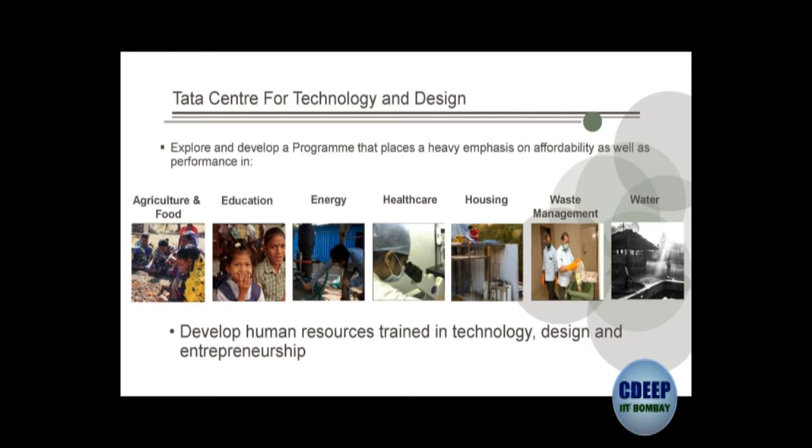So, this is something you know about Tata Center. We have different areas in which we are working, and all of them are of interest to society. This is a project that comes from the food and agriculture area, and as the title says, Jaggery.

There is no need to tell you what Jaggery is. Almost every Indian knows what Jaggery is, and probably all of you know how it is produced, especially those coming from Maharashtra, Karnataka, Uttarakhand, Delhi, Meerut, Andhra Pradesh. Everywhere you see a Jaggery making plant, but the main feature is that these are small scale plants. I would call them typically a cottage industry. The capacity doesn't go beyond a particular limit, and this is the way it has been happening for so many years, about 200 or more years.

If you go to a Jaggery plant today, you will not see much different from the way it was done long back. That is because this is a sector which has not really seen the high-end research or development that's happening on the technology front. There are reasons behind that.

Anyway, now coming back to why we are working on this. As I told you before, in Tata Center the idea is to see a possibility of making interventions, either technology or design interventions, to help the community which is at the base of the pyramid. Who is at the base of the pyramid here? We are talking about farmers who are growing sugarcane. Some of them are selling this sugarcane to sugar factories, but there are few farmers who are not able to sell their sugarcane to sugar factories for so many reasons.

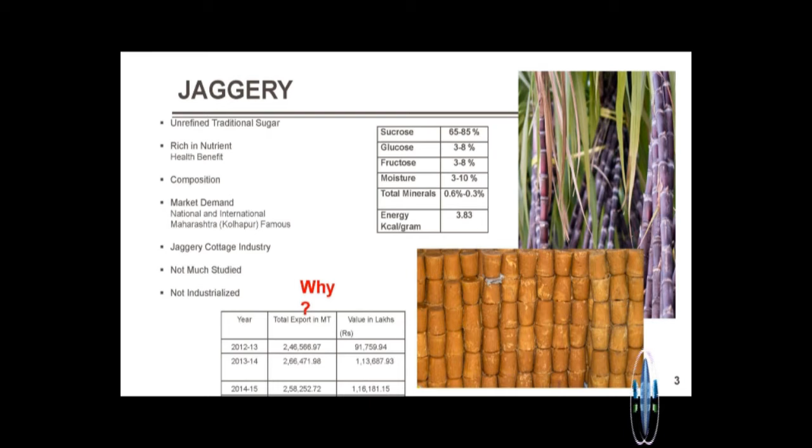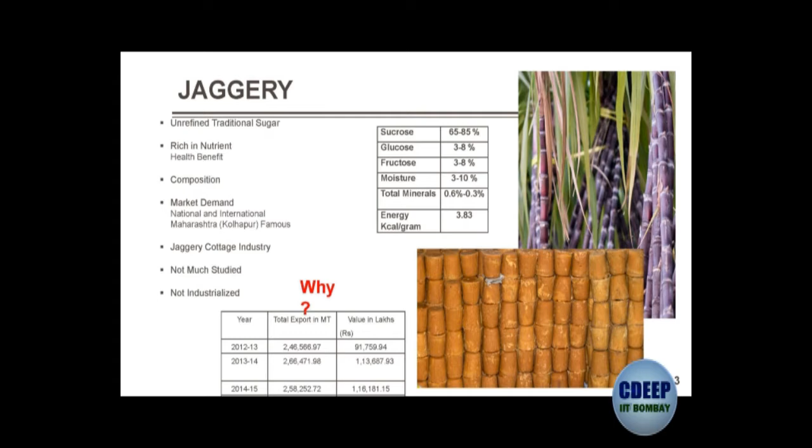Now of course this is the information about jaggery, all this I have told you just now. Jaggery as a product is rich in nutrients compared to sugar, all of you know. If you are able to make jaggery on a large scale and make it more popular, then health wise also it's a win-win situation. On one side it will fetch more earnings for farmers, on the other side you are adding a very good food sweetener in your basket.

Now the way jaggery is made, of course I don't need to tell you in detail, those who have visited jaggery making units. Cane is brought to the unit, it is crushed, cane juice is clarified. Chemically it is nothing but water, sucrose, fructose and glucose, and some impurities like proteins, gums, and some metallic impurities, iron. I would say impurity because iron sometimes is nutritious, but from the point of view of sweetening, iron may not be desired.

So all these ingredients, now I want to make jaggery out of it. The first thing is, if I just evaporate water and get a residue, it will be much more dirty, it will look like a black tarry material. So we need to remove these impurities, especially the proteins and gums, and allow the crystallization to take place, while also getting a product with a desired color, a bit attractive, yellowish. So the clarification is done.

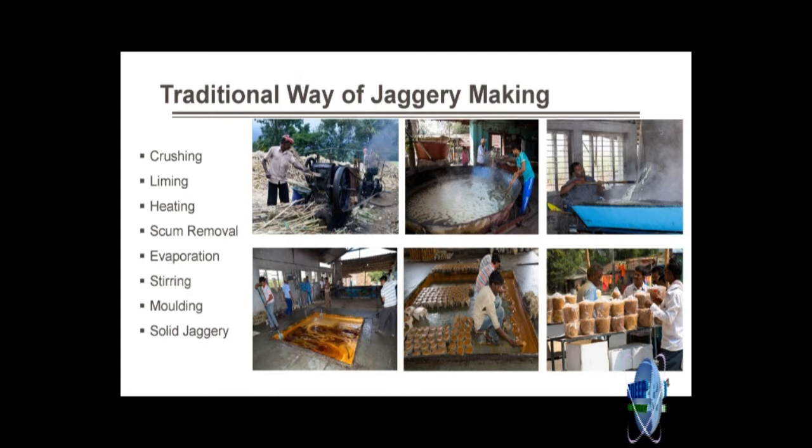And then you evaporate it. Once it is evaporated to a particular concentration, this hot thick syrup is then taken for crystallization. This is where the crystallization is happening. And then you put the stuff in the molds, and then the molds are taken out and taken to the market.

How is it different from sugar? Chemically, white sugar is almost 100% sucrose, crystalline sucrose, and this is a mixture of sucrose, glucose, fructose, and whatever trace materials you have. That's why, from a texture point of view also, it is different from sugar. It is not fully crystalline, it's a mixture of crystalline and amorphous matter.

All right, so now this is the scenario, this is the way it is done. Now what is the problem? Why can't we go to slightly higher capacities? It's because of this particular case.

You have a pan which is 13 feet in diameter, and that's the maximum one can do, because if you want to increase the capacity further, then you need another pan. Then you have to have multiplication and you need more labor. Considering the scarcity of laborers, going for multiple units to increase the capacity is not a good option. So that's the main problem.

So when we did this survey, we almost visited 400 to 500 jaggery making units. We had a questionnaire and we have the data. It says the first problem they encounter is getting labor to make jaggery. And if you get labor, they may agree, take an advance, and run away. This is the situation, that's the first problem.

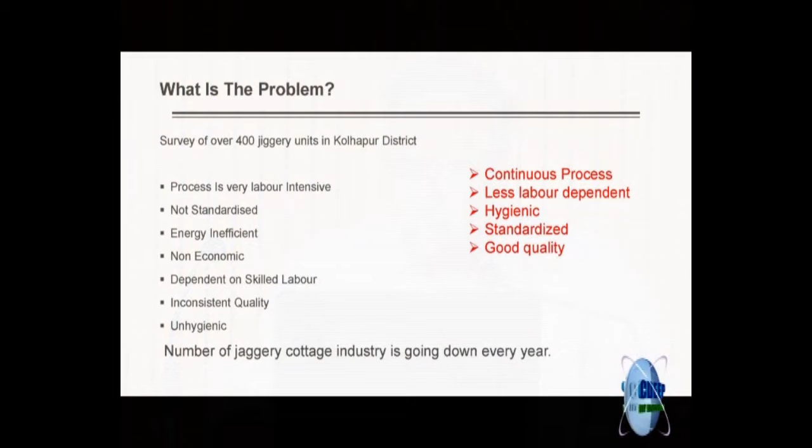So exactly similar way, or exactly the way sugar is made, and that is done on a very large scale. We don't want to compete with sugar here. We want to make the life of jaggery makers or the farmers associated with jaggery making simpler or easier and get more profits. So we thought that we'll go for a continuous process.

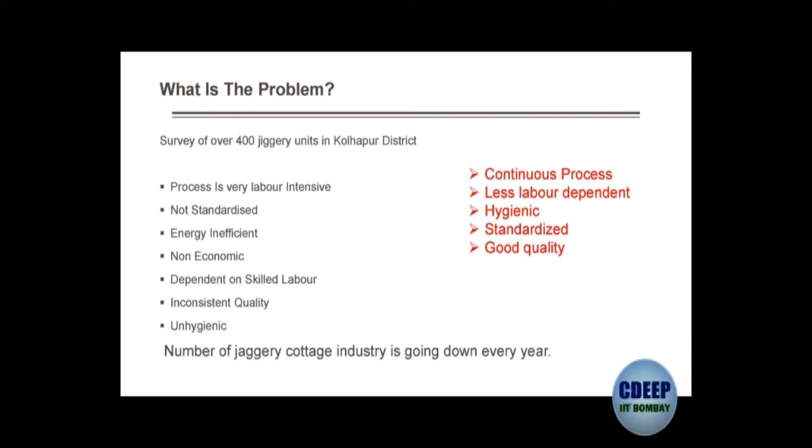So this is what I have told you, these are the problems. It's highly labor intensive, and there are other issues also. So what are the interventions that we have done?

Now the way clarification is done at present is that you add some additives. The proteins will float on the surface and you have to manually take them out. I would call them mostly proteins, but there are other impurities also, some inorganic salts too. They are removed in the form of scum, and what you get is a clarified juice.

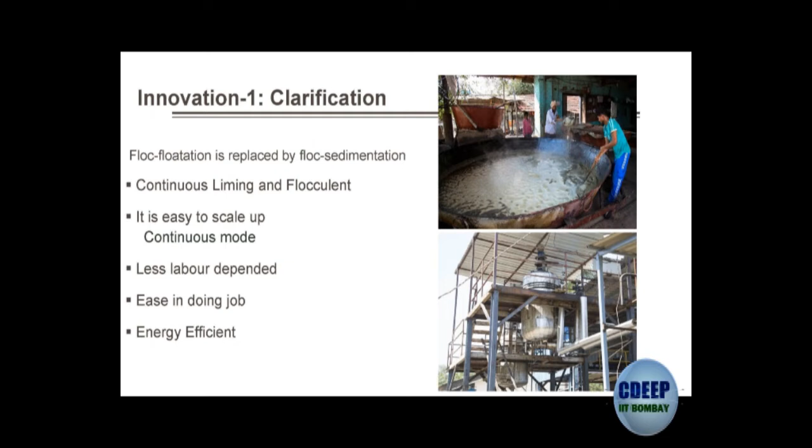Now how do you do it in a continuous mode? So we had typically a clarifier, and of course I should have shown the schematic here, but you have continuously the cane juice going in, and the additive also going in continuously, and instead of scum floating on the surface, it settles down.

Now where is this idea coming from? We saw that in the sugar factory, this is the way it is done. So instead of using a flocculant which is used normally for jaggery making, in which the scum floats, we are using a flocculant, or coagulant, that is used in sugar factory, because of which you have the scum settling down.

Next is the heating system. Normally the way heating is done is, you look at this. This is your pan, and below the pan you have a big furnace, a pit furnace, and a laborer would continuously send in the bagasse. It's a highly labor intensive process.

You can imagine, most of the times, the season is October to April, so especially the second half when you have summer going on, a person continuously standing there sending in bagasse has its own difficulties. You can imagine the kind of pain that he would be going through.

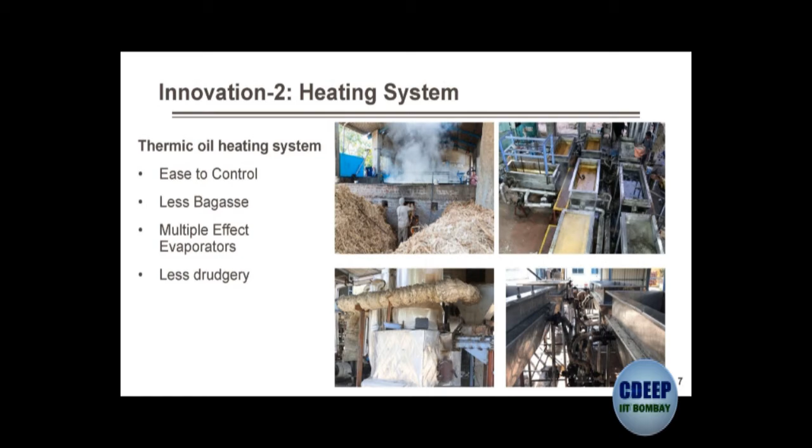I don't know whether you are aware of the multiple effect evaporator, which is commonly used in sugar factories, wherein the energy consumption goes down drastically. When you are evaporating some solution, the vapors come out, that is steam, and it has its own heat. So you can use that heat itself to evaporate the rest of the juice, and you may get some saving in consumption. In fact, depending on how many effects you have, the saving may go down that much. So that's another intervention.

The third intervention is in crystallization. Now you are doing it in continuous mode. The way it is done at present is this: the syrup is poured in pits and then you stir it, and you can see how many people are doing it simultaneously, and then after some time the crystallization would take place, about 15 minutes or so, and then you put it in a mold.

But in a continuous process, when the evaporation is happening continuously, you are continuously getting this syrup. It's not like the batch is over and then you put it. Now this syrup has to be crystallized continuously, for which we have designed a new crystallizer. It's a screw conveyor type apparatus.

Tomorrow we will show you the clip also, so that you will get a clear picture as to what exactly is happening. So this syrup would fall down in this crystallizer, it's continuously moving, and the screw would push this thick material. Now as crystallization is taking place, you have more and more thickness building up, so the movement becomes a bit tricky.

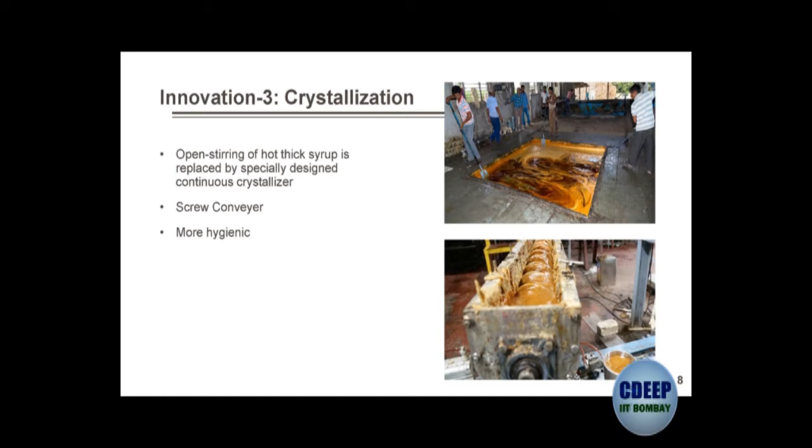For that we need a screw. The screw would also ensure that you have enough stirring so that you have proper nucleation and growth of crystal happening. It has to be designed properly, and since there was no literature data, we had to do many experiments to come up with the right residence time for such crystallization to take place. Every intervention, every innovation I am talking about here involved a team of at least 4 or 5 students plus project staff working together for 6 to 7 months on average per intervention. We've been working on this for more than 4 years now.

Last but one is the molding. This is done manually right now. You can imagine your crystallized matter coming out continuously. Instead of doing it manually, if you have a mechanized way of molding, it would serve the purpose, and this is what we have designed, with a continuous flow of molds. They collect the crystallized matter and move forward, and then demolding takes place after some time when the entire material has solidified. This is again the internal, indigenous research through which we have come up with this particular unit.

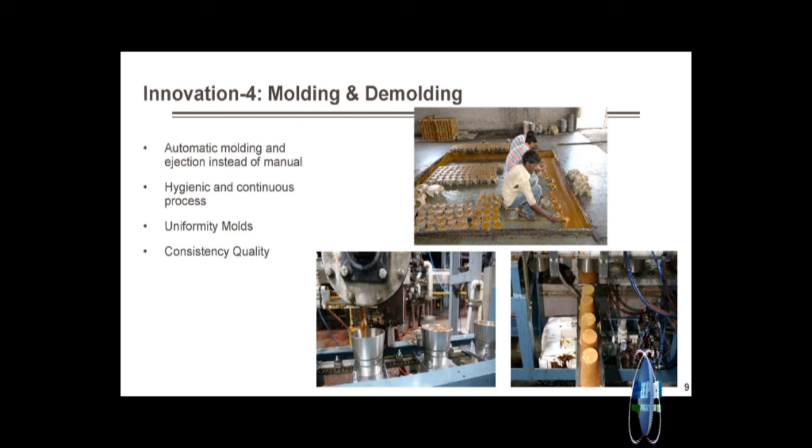And you get nice jaggery blocks. In real practice, typically it is done with the help of cloth and there is no surface finishing. Of course, it's a matter of appearance, and the taste would depend on so many other things, but the product looks good.

Now that we have this, you can have different sizes of molds and get a product of whichever size and shape you want. This is very important because if you want very small blocks in a batch process, it becomes more labor intensive and the cost goes up. But since we have mechanized this, it is easy for us to make blocks of whichever size we want.

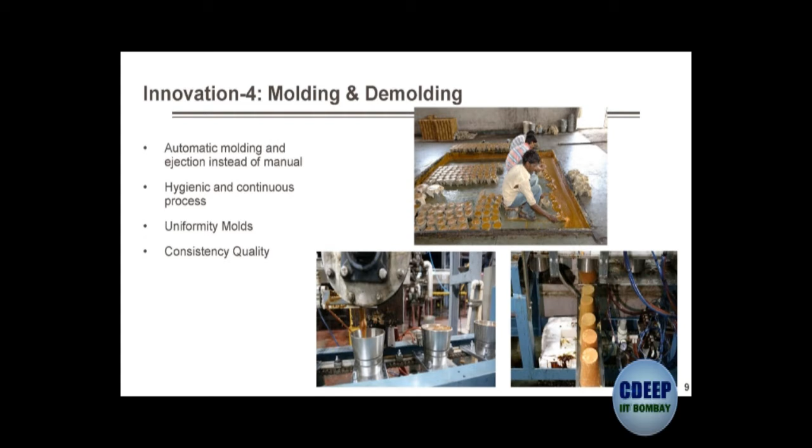We are also working on powder now. I think I have one slide on that.

The last innovation is about drying. The fuel used here is bagasse, which is a residue after crushing cane, and this bagasse is wet, about 50 to 60% moisture or juice in it. In a conventional process, it is spread out and allowed to sun dry, and you can see so many people are required to achieve this drying. You can't just spread it and wait; you have to renew the surface every time so that drying happens faster. That's a problem, highly laborious work, because of which many laborers are turning their back on jaggery making.

So what we have done is introduce a rotary dryer. I'm not saying this is rocket science or a new dryer altogether; it's used for solid drying in many industries, but this is the first time, to the best of our knowledge, it's being used for jaggery making. The drying happens with the flue gas coming out from our burner, so we do not need any additional heat for drying, resulting in much saving in labor and land. It's continuous crushing happening, the wet bagasse goes to the dryer, and the dry bagasse is sent to the burner directly. Nice integration.

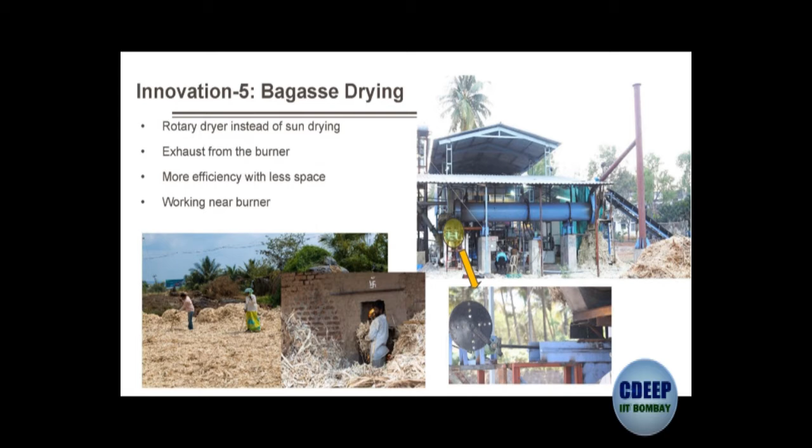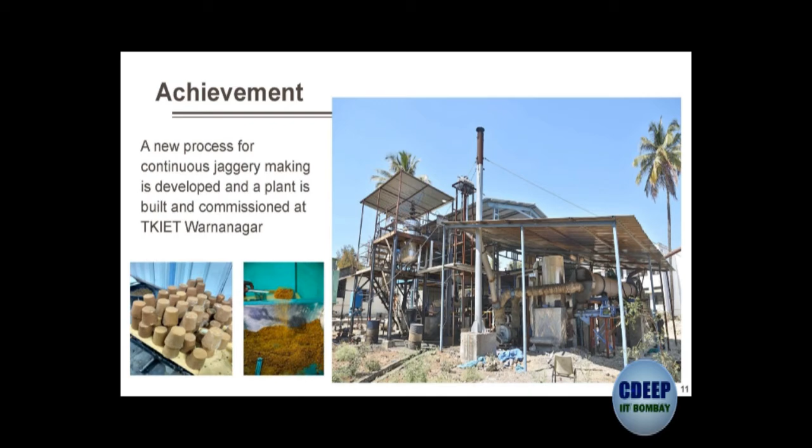So for the heating system too, there is an intervention. With all these, we have been able to put up a unit at a commercial scale of 1 ton per day. As I mentioned earlier, this is in collaboration with a private engineering college near Kolhapur, a rural engineering college, and this particular unit is placed on the campus of that college. Our entire jaggery project team works there; we have a lab established, and students and faculty members from that college are involved, and not just one college.

In that district, there are about 4 to 5 colleges who give training on mechanical and chemical engineering. Many students come there and spend time, especially during their vacation, as interns, and some of them work on projects. This is something we desire in Tata Center, where we collaborate with people and it's a win-win situation for both of us.

Otherwise this was not possible. If we hadn't collaborated with the college there, we couldn't have done this, because earlier we were bringing cane from farms about 300-400 kilometers from here. The transportation cost itself used to be about 3 to 4 times higher, so we can't afford that. And by the time cane comes here, sometimes it's fermented. So all these issues are there.

So you have to go to the place where it is being used or produced. At present we have this unit, and we have prepared a bankable report also. So any entrepreneur who wants to take it up, we are ready to translate or transfer this technology. In fact, some have shown interest in techno-economic feasibility studies and worked with us. The only problem is that it's capital intensive and will work only at a particular scale.

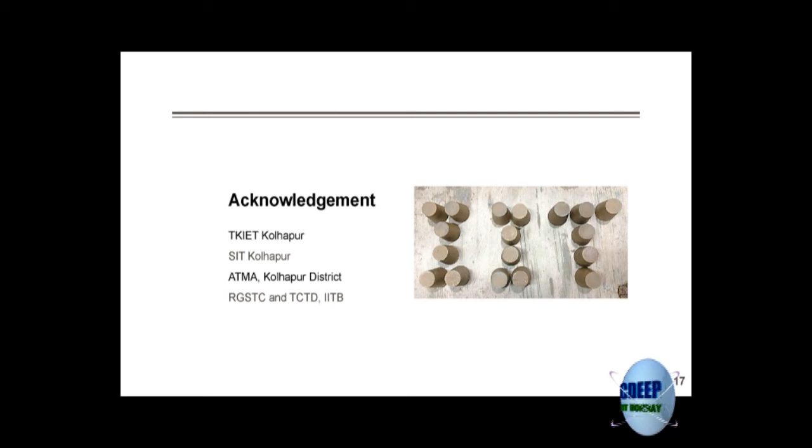The next one is where we are talking about waste management. This is one of the areas in Tata Center where we try to look at how technology can help achieve waste management in a better way. Now if you look at overall waste, especially municipal solid waste, it has many components, and every component has to be treated separately. If you could treat the entire waste all together, nothing like that—but then there are many problems in terms of emissions, and probably you won't be able to use it properly in terms of its energy content.

Many people do incineration directly, but our waste, especially waste in India, is not suitable for incineration because it has very high water or moisture content. You need to spend so much energy vaporizing the water itself, so it doesn't become economically viable. That's why treating Indian waste is a very different problem compared to, say, European or American waste.

There are many efforts going on already—it's not that we are the only people working in this area. But we thought we would take up a problem of interest to us, in the sense that, again, we don't just work in the laboratory, we want to test it somewhere. Now if you want to test municipal solid waste management, there can't be a better place than the IIT campus.

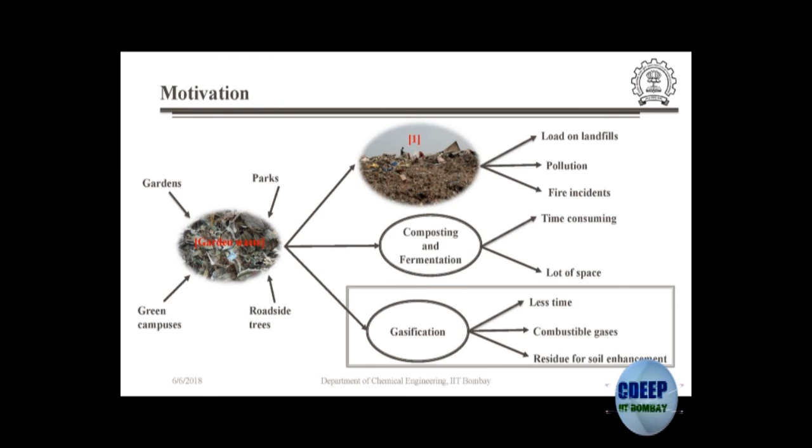So we thought that we will apply all our technologies that we develop for waste management in the IIT campus. There is a big project going on wherein the institute has given us space, and we have assured them that at some point we will make this campus waste free.

Now there are many components in the waste. I would say wet waste, dry waste is a very broad categorization. In dry waste, you have plastic, paper, metal, glass and so on, and every component has to be treated separately. So segregation has to happen first.

So we started with a segregation drive and it worked out very well. At present we have almost 100% of families segregating the waste very well, and it's collected well.

Now, for every component we have one group working in the laboratory to develop a proper technology that can be demonstrated. I am going to talk about only one technology now, for the next 3 to 4 minutes, on how to treat garden waste.

Now, garden waste means what? It is basically dry leaves, twigs, broken branches and so on. IIT campus is a green campus, and every day we generate not less than 2 tons per day of green garden waste, and that is only from the trees on the road. We are not touching those inside at all, so there the leaves are falling down and getting composted.

So whatever garden waste comes, how do we take care of that? The idea is to use it such that the entire management becomes viable. Now, what is the problem?

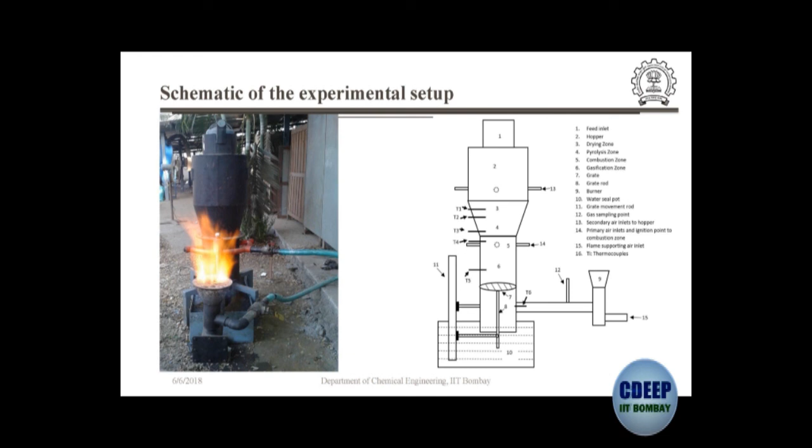Gasification, in one line, is basically converting solid carbon into gaseous form—not carbon dioxide but carbon monoxide and hydrogen, which is called producer gas, used for heating purposes. If you burn it, you get some calorific value from it. So that is what we are doing here.

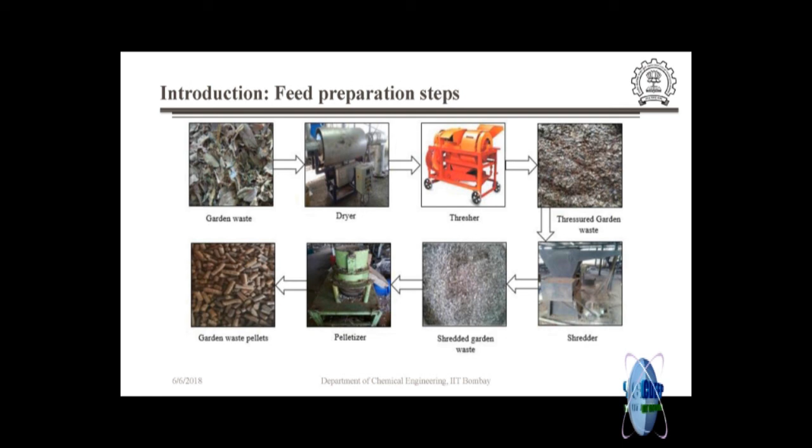So this dry garden waste is processed, converted into shredded form and then pellets, and these pellets are used in the gasifier at the end. This gasifier has already been tested and is working well.

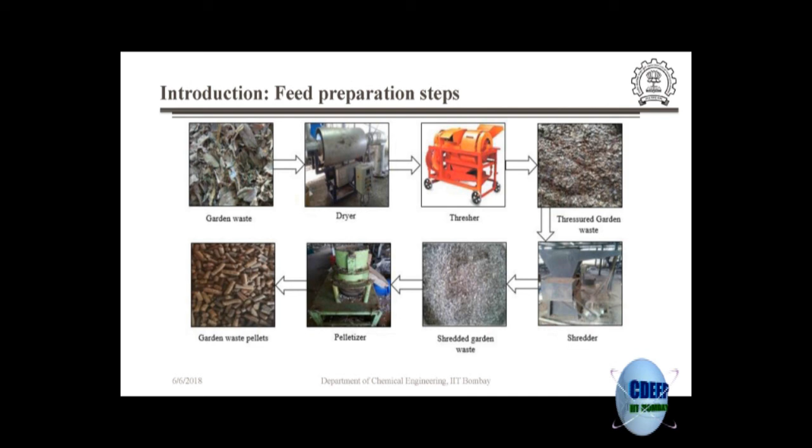Now we are looking at a business model for that. It's not just for municipal solid waste—this gasifier can be used for agro waste as well. You know the agro waste problem in Delhi, Punjab, and everywhere—farmers have to burn this agro waste within a short time due to farming cycles, otherwise there's no taker for it. So much biomass is available, people are just burning it, and unnecessarily causing pollution.

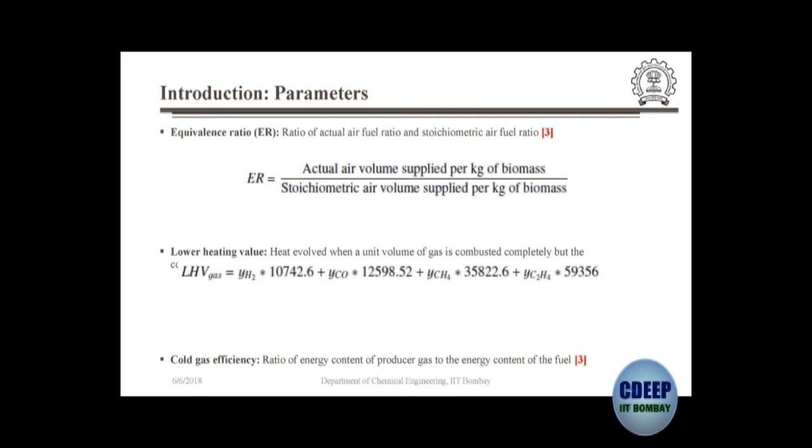So if you can use this biomass to make pellets and convert that into gas that can be used for cooking purposes, it will be a great value addition, and that is what we are looking at. So with this, I will stop here. Thanks.